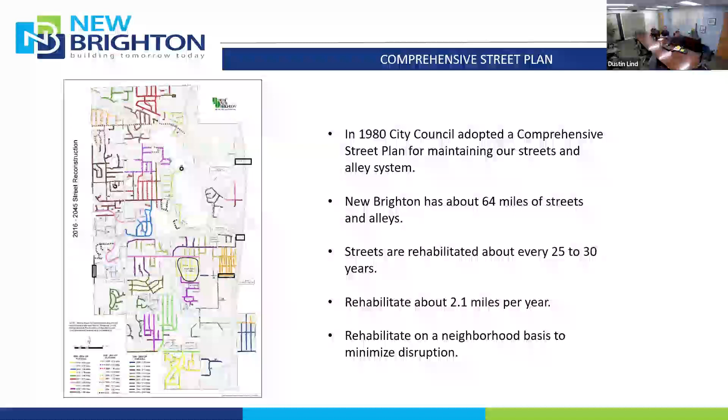New Brighton has about 64 miles of streets and alley in total. The streets are rehabilitated about every 25 to 30 years. Kind of breaking that down, we try to rehabilitate about 2.1 miles per year. And we also try to rehabilitate them on a neighborhood basis, just to minimize disruption to the residents.

More recently, on January 9th, 2024, the City Council approved a Living Streets Plan. The vision of that plan is to improve the quality of life in New Brighton through infrastructure improvements, being designing streets to include safe and comfortable routes for pedestrians and bicyclists, that also moves vehicles slowly but efficiently. We also look to create a sense of place that celebrates the feeling of community in the city and protect and enhance the urban forest and environment.

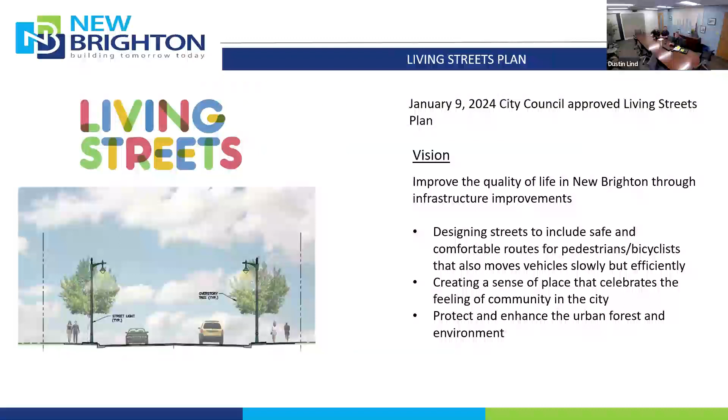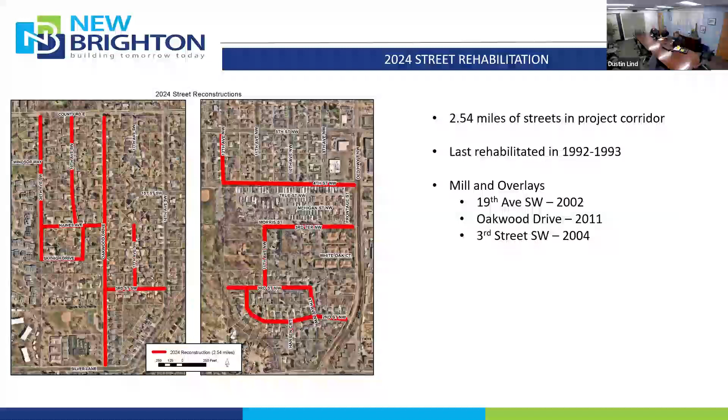So focusing on the project for this year, there are 2.54 miles of streets in the project corridor. The streets were last rehabilitated between the years of 1992 to 1993. There were a few streets that did receive mill and overlays. Those are 19th Avenue Southwest in 2002, Oakwood Drive in 2011, and 3rd Street Southwest in 2004. The streets that were mill and overlaid, we typically expect about 10 to 15 years performance from that mill and overlay. And looking at those dates, we're certainly pushing up against that right now.

Street improvements. So on the surface and at a first glance, what we're proposing for the surfacing is remove the existing bituminous surface, remove the existing aggregate base material, installation of new aggregate base section, and then installation of a new 5-inch bituminous surface. That will give us a 9-ton road, which is a little bit beefier than what's out there now, and we expect it to last at least another 30 years. The last piece to that would be to saw and seal expansion joints in the new surface to kind of control that seasonal cracking that happens, those freeze and thaw cycles.

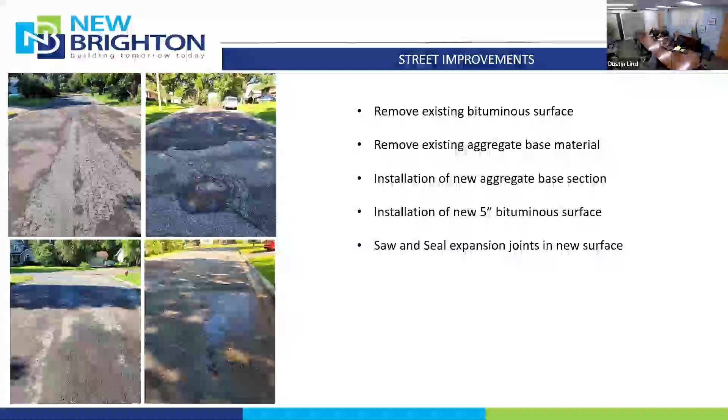Street improvements, living streets implementation. So right now I'd like to talk about and go over how we're going to tie the newly adopted Living Streets Plan into this project. This would be the first year that we're looking to implement that. So to help us through that, we created a checklist to use on each street and analyze what's going on with that street. And what we're really looking at is street category. Are the streets local, minor collectors, or do they carry a lot more traffic like major collectors?

We also looked at potential needed features and action items, those being sidewalks, proximity and connectivity to parks, schools, trail networks, etc. Bike facility needs, whether those are painted lanes or protected. Parking needs, tree canopy improvements and additional boulevard trees, storm sewer and drainage improvements, placemaking opportunities, public transit adjustments, and crosswalk safe routes to school. With all that said, utility improvements and impacts also are considered during the review, because if we have a large scale utility improvement that impacts a lot of curb and gutter, that's the time that we would like to make some of these changes and be more inclusive with the Living Streets plan.

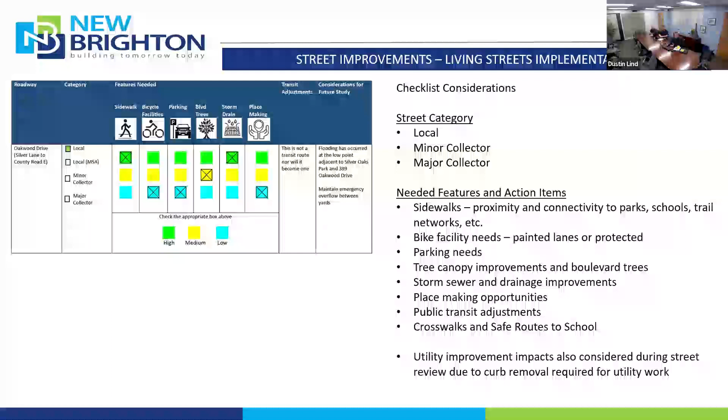So after reviewing the checklists and all the streets, we did find some needed features that are certainly needed in this area. One being a street width reduction to promote safer streets. Two being sidewalk connectivity to Silver Oaks Park and Hansen Park. Potential for additional boulevard tree plantings also came up, and storm sewer improvements to reduce localized flooding.

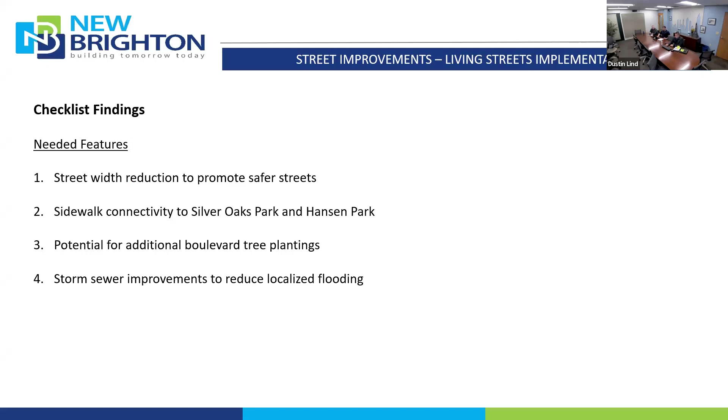The first thing, sticking with the Living Streets plan, is to go over what we're looking at for the street width reduction. There's a map here on the screen. There's a lot going on there, a lot of colors. I'll walk through it here. So the green streets right now, we're proposing to reduce the width from their current width of 30 feet to 27 feet. So overall, that would be a 3-foot reduction in the street width.

The blue streets, we're looking at a street width reduction of 6 feet, so going from their 30-foot current condition down to 24 feet. And the red streets, we're proposing no changes to the roadway width at this time, primarily due to there's no major utility work taking place on those streets, so the curb lines will largely stay intact on those streets.

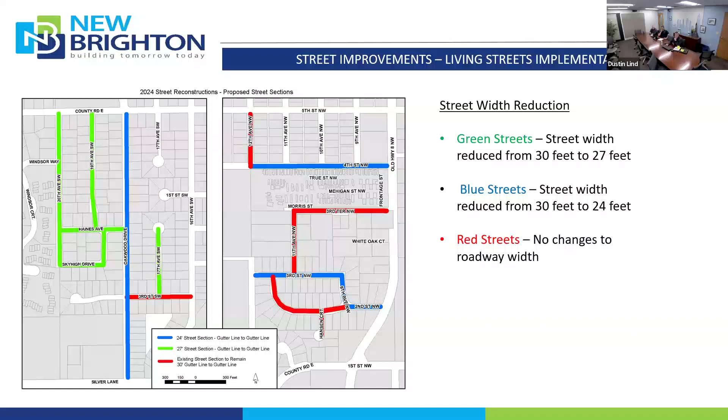And then just to dive into a little bit more what those sidewalks will look like. The sidewalks are proposed, as you would have noticed, on the 24-foot wide streets. So we'll be shrinking the streets down a little bit more to accommodate that sidewalk and boulevard. We're looking at a 5-foot wide concrete sidewalk and a 5-foot wide grass boulevard. The key piece is the outside edge of the sidewalk will extend roughly 3.5 feet from the existing back of curb location. So we're not taking the 5-foot boulevard and a 5-foot sidewalk and putting it 10 feet up into someone's front yard. With the reduction of the street width, we'll actually be pulling it in a little bit from that.

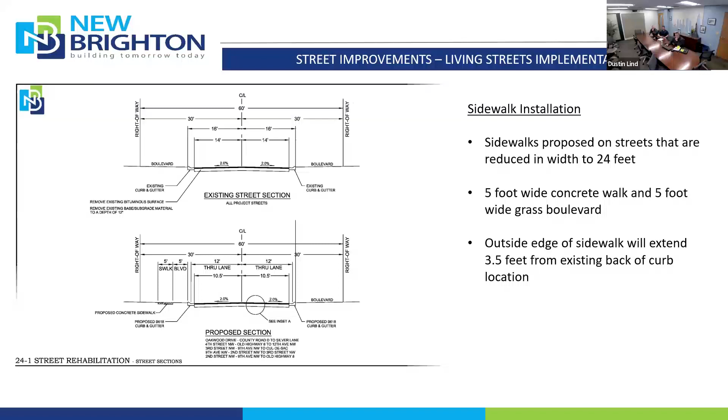So the water main work will take place on 20th Avenue Southwest, Haynes Avenue, Sky High Drive, 19th Avenue Southwest, Oakwood Drive from County Road E to 3rd Street, 17th Avenue Southwest, a little bit of Second Street, 9th Ave, and Third Street Northwest. In total, there's 9,000 feet of water main that's going to be removed and replaced. 140 service lines, and we'll replace the service lines from the water main to the curb stop. 38 water main valves and 18 fire hydrants.

Water services with a history of freezing will also be insulated during this process. And it's also important to note that while we're doing this water main removal and replacement, those houses affected will have to be put on a temporary water system. Essentially it is a plastic pipe run in the boulevard, and then houses are fed via drinking water garden hoses to their spigots.

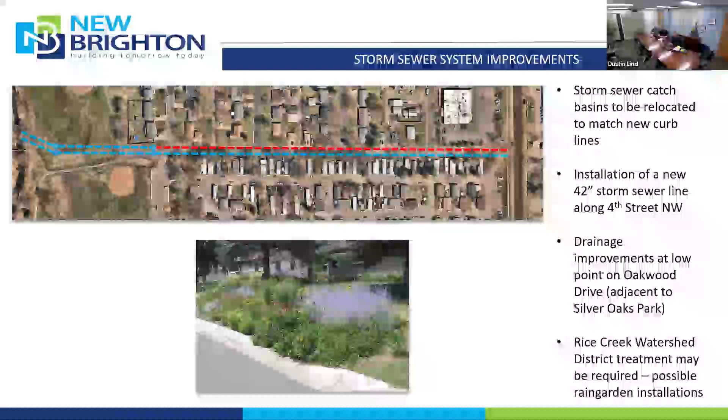Storm sewer system improvements. When we look at shrinking the roads, the curb lines obviously go with it, and so do the drains that are located in the curb lines. So a majority of the catch basins will be relocated back into the curb line.

Most notably, the biggest storm sewer improvement is going to be the installation of a 42-inch storm sewer line along 4th Street Northwest. This is being installed to mitigate some local flooding issues, actually east of Old Highway 8, kind of in the industrial area.

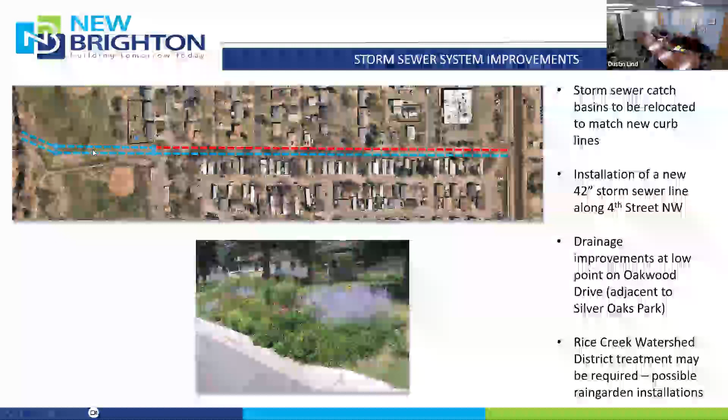The blue line on that screen is an existing 42-inch storm sewer system. And then we actually installed, ahead of this project, a secondary 42-inch line here through Hanson Park when they were working on that project this summer. So essentially we'll be connecting from Old Highway 8 down to what was constructed this past summer.

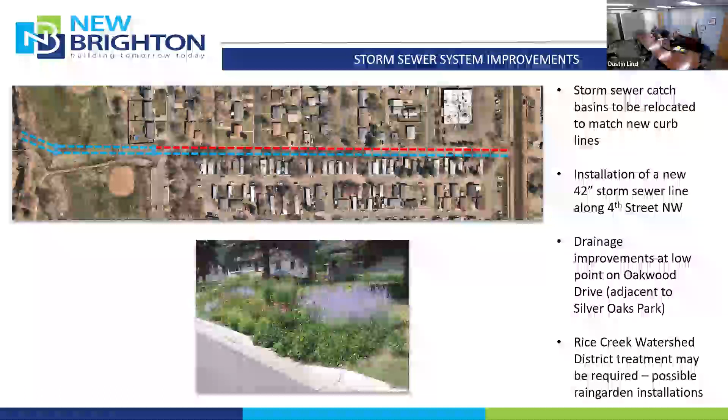We're going to look at drainage improvements at the low point on Oakwood Drive. That's adjacent to Silver Oaks Park. Historically, there's been some flooding in that location. And then Rice Creek Watershed District treatment may be required. We are in contact with them, trying to work through that process if required. You're likely going to see installation of some rain gardens behind the curb as pictured in that picture on the bottom there.

Project funding. So for the street reconstruction portion of the work, that being only the new asphalt surface and the aggregate base material, 75% of those costs are paid for by the city. The remaining 25% are considered assessable and they're resident paid costs.

You'll notice that the sidewalk construction is all paid for by the city and not assessed to residents, as are all the utility improvements. So the water system improvements, storm sewer, and sanitary sewer system improvements are all covered by the city. That also includes curb and gutter. Those costs are considered part of a stormwater conveyance system, so those fall underneath storm sewer improvements and will be paid for by the city.

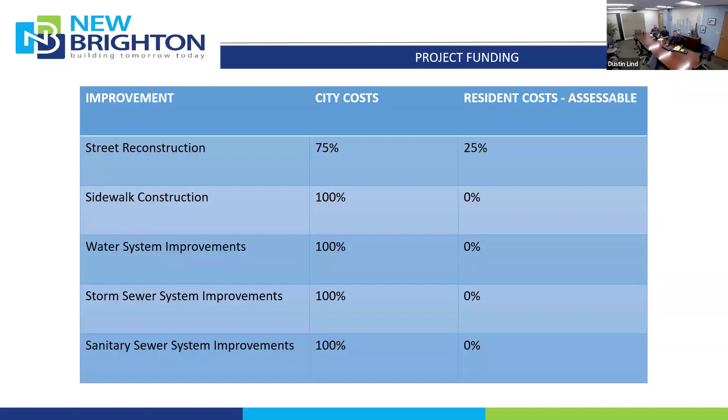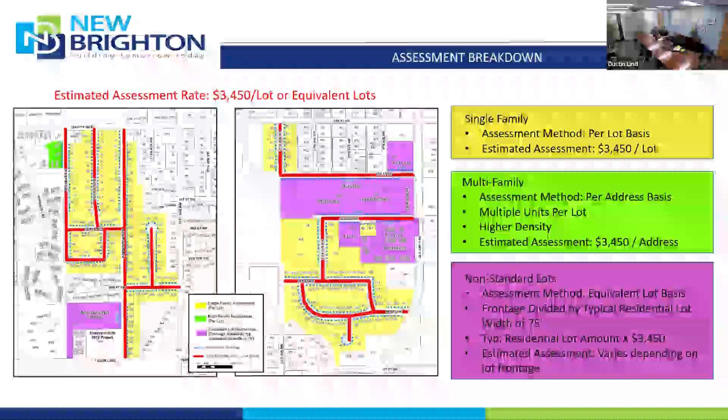So assessment breakdown. The estimated assessment rate for this project is $3,450 per lot or equivalent lots. That's historically been the most common and equitable way when largely all the lots in the project are the same size, same use, and receive the same benefit from the project as a whole. There's a few anomalies to that, and there's a lot going on here, so I'll just kind of break this down and go over what each and every one of these colors are and what it means for residents.

So I'll start with the single family lots. Those are pictured in yellow. As I mentioned, they're on a per lot basis, meaning each lot's going to receive the same assessment amount, which is estimated at $3,450 for each lot, regardless of street frontage.

And I'll note that corner lots will receive only one assessment charge, same as every other property that's a single family, because New Brighton's policy is to assess on the short side of the lot, meaning you won't be assessed on both sides of your property if you are a corner lot.

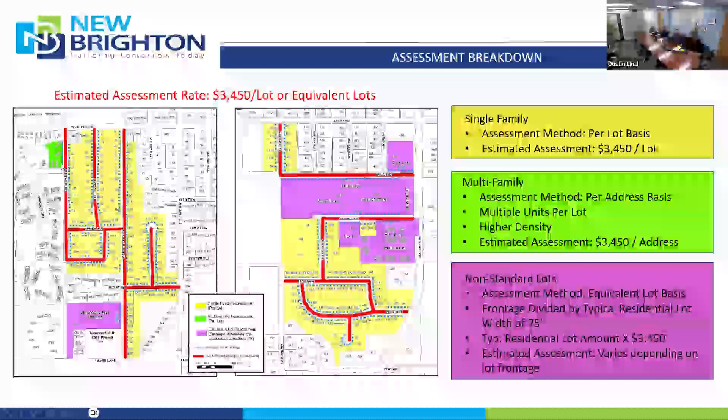There are a few multifamily or duplex properties located on 20th Avenue. We are proposing assessing them at the same 3,450, but per address, based on the higher density, and there are multiple units on that property. So they'll receive an assessment rate of 3,450 per address. So times two, there's two addresses, duplexes on those properties.

And the last piece, I kind of call non-standard lots. So those are properties that have frontage on one of the street rehabilitation streets, but are part of a much larger parcel. So those you're looking at like a Silver Oaks Park, Oak Grove Mobile Home Park, kind of the Mirage area, this White Oak Court, the Heritage Oaks Townhome community is a little bit of an anomaly, and then there's one lot that's already been split but is recorded as one right now.

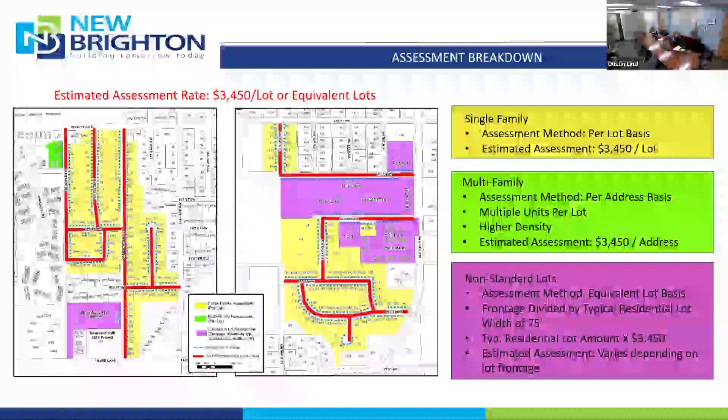So to handle that, we're looking at an equivalent lot basis, meaning we're going to take the front footage that abuts the street and divide that by the city standard lot width, which is 75 feet. That will give us an equivalent amount of residential lots that in theory could be on that frontage. And then we'll multiply that amount by the 3,450 per lot basis. So that assessment amount will obviously vary for each one of these properties. If there's any residents on here, business owners, feel free to let us know and we can talk more about what your specific situation is in more detail.

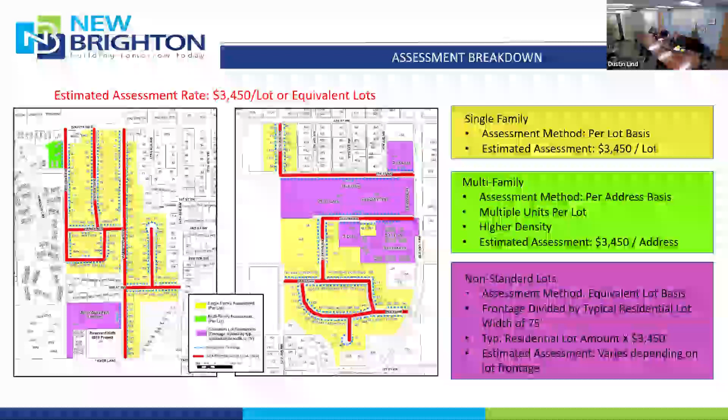Assessment breakdown. So payments are available in two ways. The payment in full is accepted for 30 days following the assessment hearing, and that's underlined, that the assessment hearing will not be held until September of next year, so September of 2025. We like to do that the year following just to make sure all of our project costs are in line and we're not missing anything.

If payment is not received in full within that 30-day window, the payment amount will be certified to Ramsey County for collection with taxes over a 10-year period. So that'll be spread out evenly over a 10-year period. That does include interest charges. And I'll note that it can be paid off at any time during that 10-year period without penalty.

The last piece to this, there is a senior deferral option. In this case, they have to meet certain criteria. Those would be the homeowner has to be 65 years of age or older, the property has to be homesteaded, and the annual assessment amount has to exceed 1% of their adjusted gross income. In each case, applications can be filled out and submitted to the city. If it's approved by council, essentially the assessment amount will be deferred until sale of the house or death of the owner.

So with all that work that we just looked at, I talked to Xcel here a couple weeks ago, and they plan on continuing their private utility installation. So Xcel Gas, they were out there this past summer working on County Road E and Oakwood. They didn't quite finish what they wanted to, so they're proposing coming back. They're thinking April to May they'll be in there working to replace their gas mains, hopefully in front of our project.

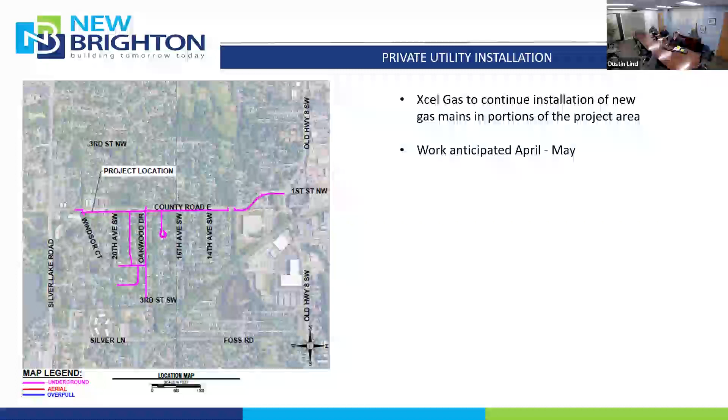Project schedule, just a quick snapshot at where we're at and where we want to be with the project schedule. The neighborhood informational meeting is kind of the first step into the project. After this informational meeting, we will hold a public improvement hearing. And that's essentially where we bring a feasibility study to city council and run through everything in the project, what's going to take place, what the actual proposed assessment rates are going to be, and the cost to the city. We're looking to hold that in March.

We're looking to award a contract sometime in April, maybe early May, and then start construction ideally early summer of this year. Project completion, I have a fall 2024 / summer 2025 completion date. And that's really going to be based upon who the contractor is and how many crews they can allocate to this project. There's a lot of utility work and a lot of mileage of streets and sidewalk and curb and gutter. So it's a bit of an unknown if contractors can bite off this size of a project and complete it in 1 year, but we hope that they can. And then looking at the assessment hearing, like I mentioned, in September of 2025.

Just a few notes to run through that were included on the previous slide. Access to property: residents will have access to their driveways during construction, except when major construction activity is happening adjacent to their property. I will note that water main installation is quite disruptive, and when they're installing water main on your block, if you're on one of those blocks, it's not going to be fun. The water main's about 8 feet deep, and they're digging down the middle of the road, and it's going to be a little bit challenging during that time. We'll have staff on site every day to coordinate with residents and coordinate access. So we'll keep in touch and do our best to limit disruptions for everybody.

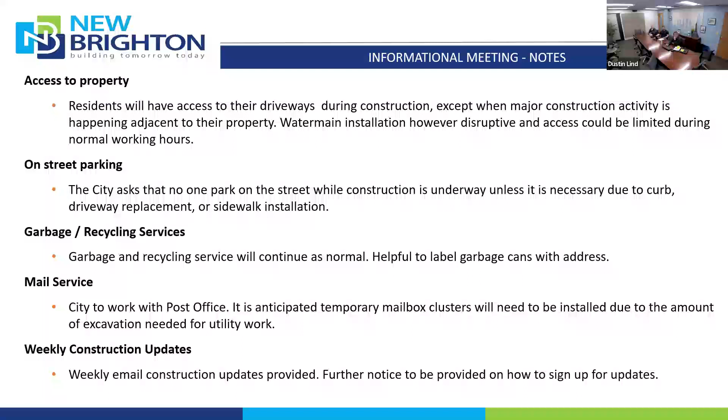And lastly, for my portion, I have a little bit of a plug here for Silver Oaks Park. It's in the area, and it was brought to my attention earlier this week that they are also having an informational meeting tonight at the same time. So I told them I would grab a few slides from them and just kind of go over what they're talking about at that meeting.

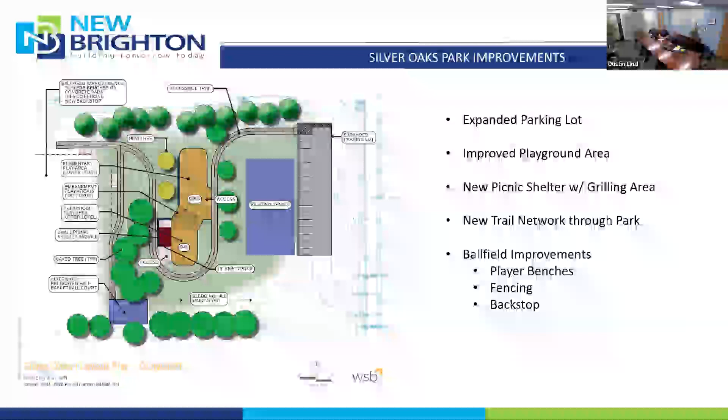The schematic there kind of shows the latest and greatest proposed plan. They're looking at expanding the parking lot to the north, on the east side of the park there. The existing tennis court is going to remain in place. There'll be some playground improvements, a new picnic shelter with a little grilling area, a new trail network through the park, and then some ball field improvements, which include player benches, fencing, and a new backstop.

Right now, I'll turn it over to Steven Toso here. He'll be your kind of main point of contact in the field. He'll be out there every day, coordinating with residents and contractors and making sure they're doing what they should out there. But he'll just run through some pictures here on truly what to expect with all the utility work and street work that we kind of went over.

Yeah, like Dustin said, I'll be out with the contractors every single day, driving the streets, making sure everything's going per plan. And I drive a white city vehicle. It's an F-150 with a big light bar on it. If you see me, just flag me down and we can talk about what's going on that day or whatever. But I'll be on site pretty much every day. So I'm your first contact. So call or email me if you have any questions or concerns that need attention right away.

And just going through the project schedule, this is what you'll see first. The contractor will bring out a large either reclamation vehicle or a milling machine and strip the asphalt surface from the street. And they try to only do this on areas where they'll be working. So we try to keep the asphalt in place so you can get in and out. We don't want to rip it up and have it turn to mud too quick. So this will be the first step in the process.

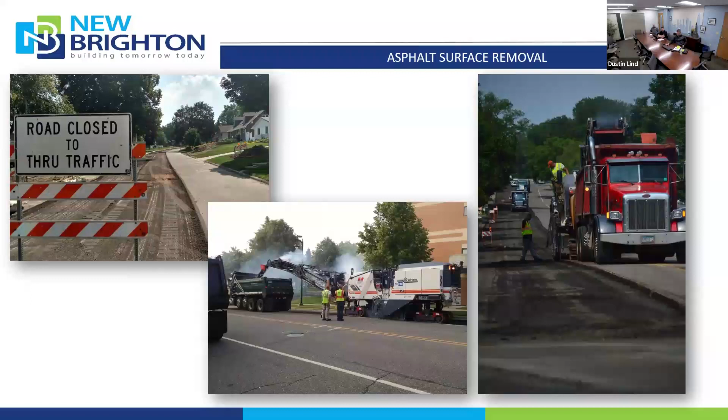I will kind of add to that, and one bonus on the side of being supplied with temporary water is it's being backfed through your house. So it's not going through your meter. So essentially you'll get free water throughout that duration.

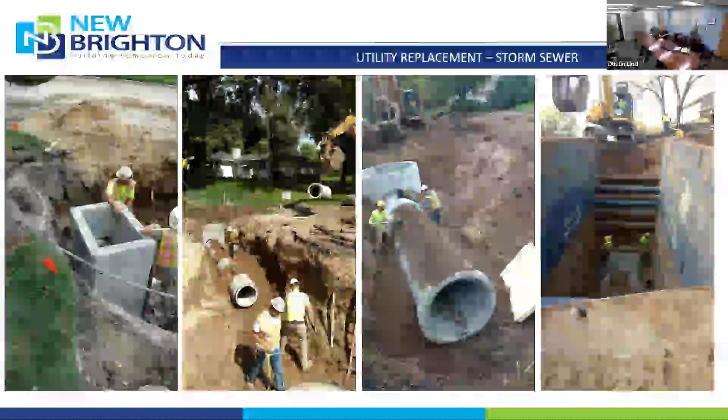And what you're seeing here are storm sewer improvements. That image on the right, that's some deep excavation there. You can see how small those guys look in the hole. That's kind of what all of 4th Street is going to look like for several weeks. It's a 42-inch pipe going down that street. It's going to be long, slow digging. And then the one on the left, that's kind of more your typical storm sewer structure. Just a little 2x3, and the storm sewer stuff goes pretty quick and they can go through that relatively quick.

And then, yeah, we do a significant amount of curb removal on this process. Every street that's getting new water main will be getting new curb on each side. Every street where we're shrinking will get new curb on each side. And on the north side of the project, 2nd Street, 3rd Street Northwest, 4th Street, that already has

B618 curb. The curbing on the south end of the project by Oakwood Drive is what you call surmountable curb. So it's a drive-over curb that will be transitioning to B618 curb, which you kind of see on the right side here. So it's a barrier curb, it protects the pedestrians on the sidewalk a little bit better. And then we will be installing curb cuts in front of every driveway.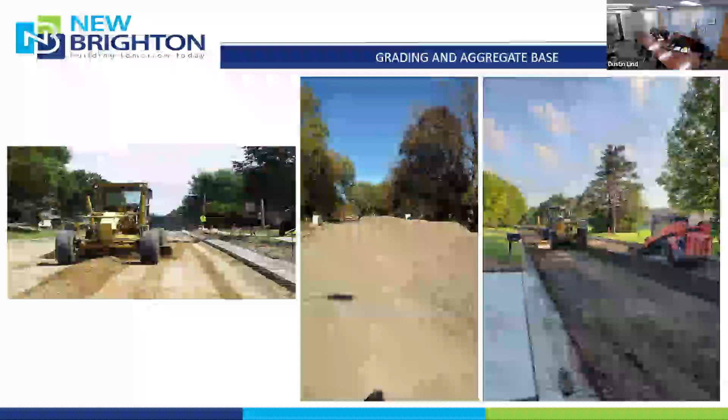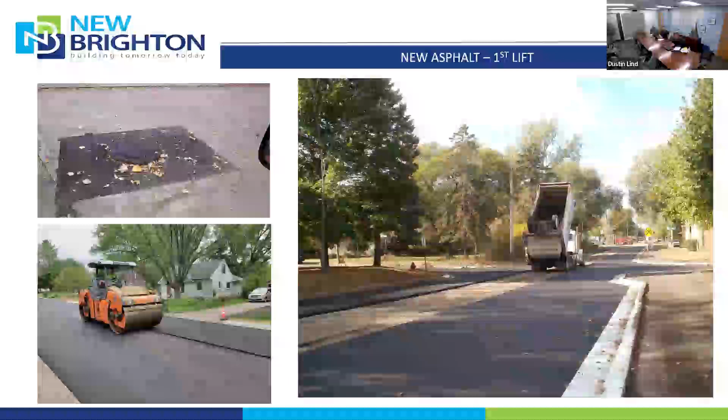And in New Brighton and on these streets, pretty much everywhere, we do 2 lifts of asphalt. The first lift of asphalt is typically 3 inches. We lower all the iron, so all the manholes in the street, and then we pave right over them. And then we come back later and saw cut through this first layer of asphalt, raise up those structures and the iron and the castings 2 inches above the surface to get ready for the next lift of asphalt.

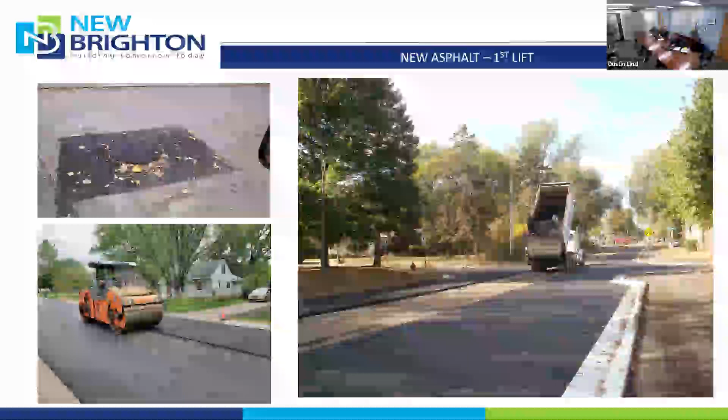And this is when things are going well. We get the final lift of asphalt and everything's put back together. We're starting to restore the project. And yeah, this is our second lift, typically 2 inches. It's a little bit different mix, so it looks nice and smooth on the end.

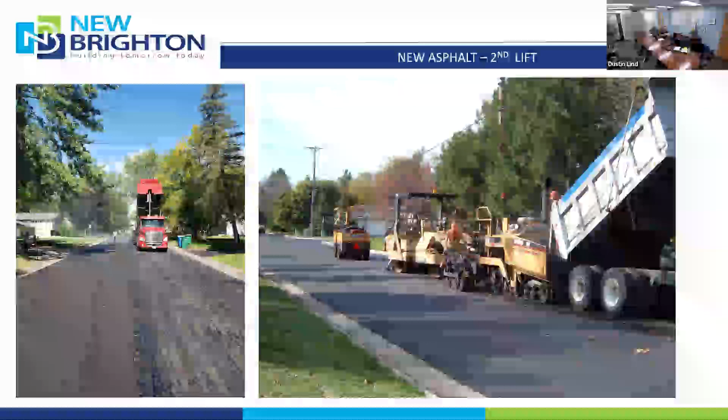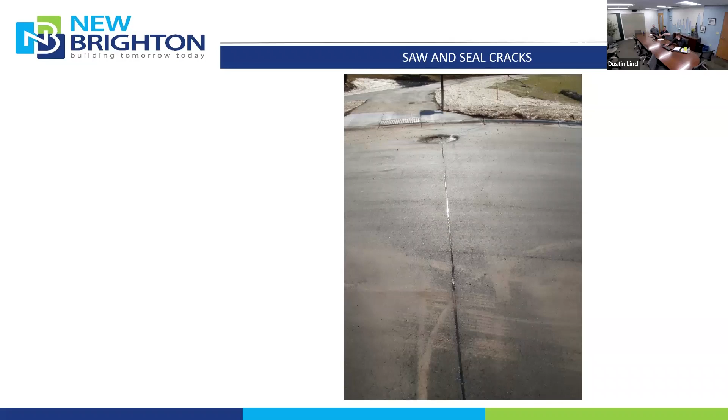It may not be a good idea to replace your driveway, noting it could get muddy, the streets are gonna get dug up. The last thing we want is to get a nice new concrete, pretty white driveway and then drive on it with muddy tires for the summer. If you've ever had a frozen water service, please let us know. We keep track of that, but in case something's missed, please let us know.

Dates of special events, family gatherings. This is gonna take place in the summer, so graduations, anniversaries, anytime you're expecting a large crowd, let us know and we'll do our best to work around those events. Any drainage issues, if you're aware of any ponding or any flooding that we haven't covered, please let us

know. And then more importantly, the special accessibility needs, we'll coordinate just like with any of the gatherings. If there's anybody that either uses Metro Mobility or needs some special access, we'll certainly work with them on getting in and out every day and when they need it.

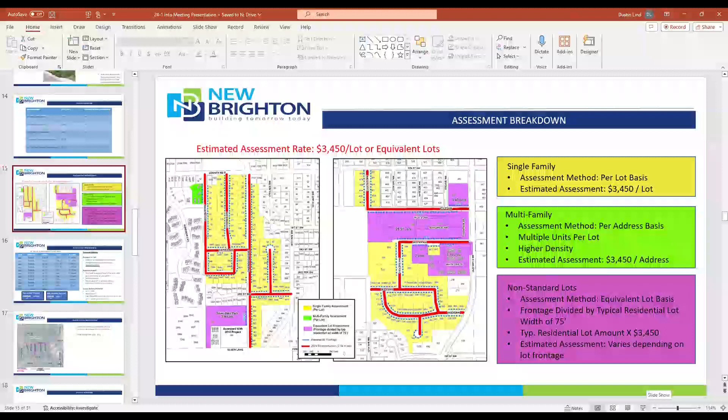So I think it's in the purple area for those of you on the video call. So it's a non-standard lot. So will people in the association pay different amounts based on this formula you have in there? Yep. So I'll kind of run through that there. That is a little bit of an anomaly even from the other non-standard lots.

So what we're proposing there is taking the front footage, what adjoins Third Terrace there. You'll notice the blue line kind of right here, if you see my mouse. Yep, I see it. That is the frontage. You guys were given a corner credit, similar to the corner single family houses, so that's knocked off the footage. And what we're proposing is taking that, 233 feet, dividing that by 75 brings you to 3.11 equivalent lots. That number will be divided out amongst the 29 properties within Heritage Oaks.

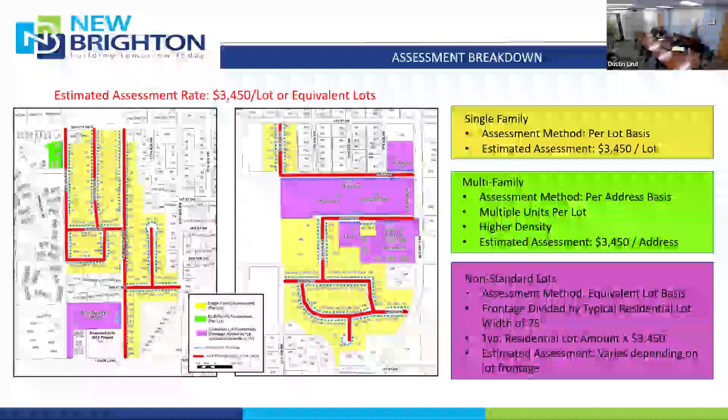So we recognize that, yes, there is frontage, and you do use Third Terrace. It does benefit to get in and out of the townhome association. But you also have HOA dues inside there too. So that's why we decided to split that amongst all those 29 properties within. Okay, so if I'm hearing you correctly, somebody might pay 3,450, somebody might pay, I'm just making it up, 2,900. Nope, they'll be split out equally. Oh, okay, so we'll all pay the same. Correct, within Heritage Oaks. Okay, and we don't know what it's gonna be.

Everything is an estimate at this point. The project will go to council at that public improvement hearing with a formal feasibility study. At that point, it'll be ordered if it is, and then we'll have a little bit more of an idea of the exact amount. And notices will be sent out to everyone involved in this project, who can attend that public informational meeting with another number on there.

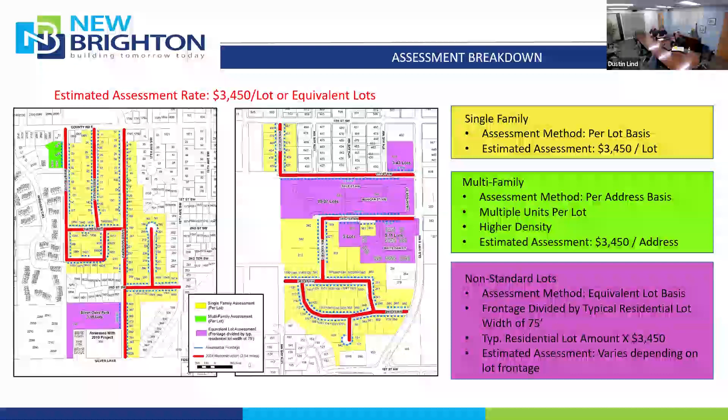Okay, and the hearing is gonna be held in 2025? No, the hearing will be in 2024, but we pay in 2025? Correct. So there'll be a couple different public improvement hearings. The first one, the public improvement hearing, is on the onset of the project and council physically orders the project. The assessment hearing is held prior to us physically adopting the assessment. So that's the one that takes place next year. Okay. Thank you. Thank you.

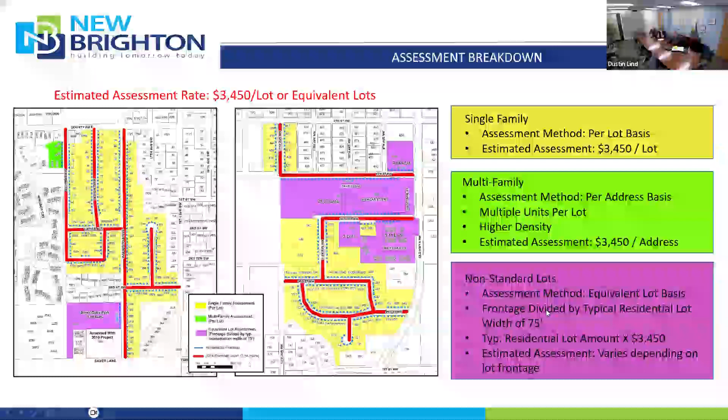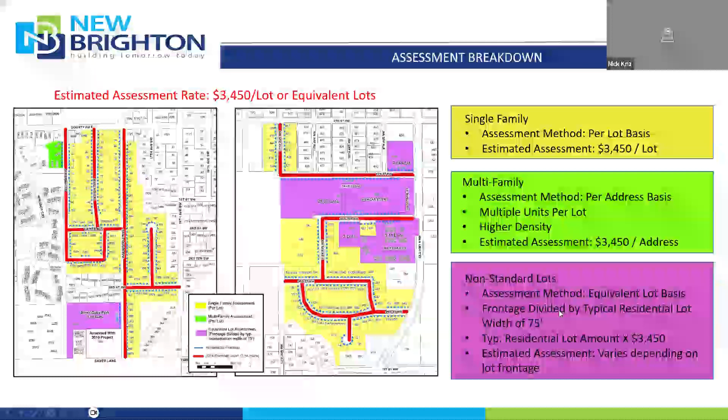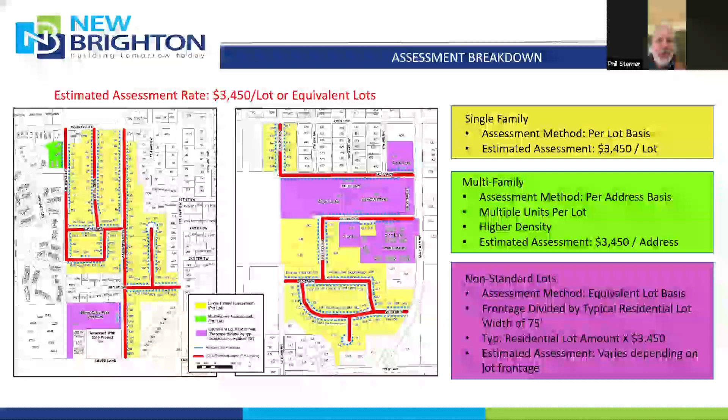Yeah, my question was on the sidewalk. You have the sidewalk on one side of the street, and I'm concerned with Oakwood Drive. Did you consider putting it on the other side where the park and the townhome association is, since they're already doing improvements and you got the park setting already? Seems like a lot of homes have had things done on their yards, and they do a lot of good upkeep on their yards, a lot of pride there. And I know with the street shrinking, it's gonna minimize that, but on the other hand, you have open parkland and townhome association land on the other side of the street. So just wondering about comment on that.

Okay, thanks, Phil. You're talking about Oakwood Drive, so the sidewalk is proposed on the west side, kind of coming down the hill. Yes, correct. We proposed it on the west side for connectivity to the park. The last thing we want to do is put a sidewalk on the east side. Now you're creating mid-block crossings or people crossing Oakwood to get to the park, which could be a little bit of a safety concern. So there was some thought into that, which is why it went on the west side. Okay, all right, thank you. Thank you.

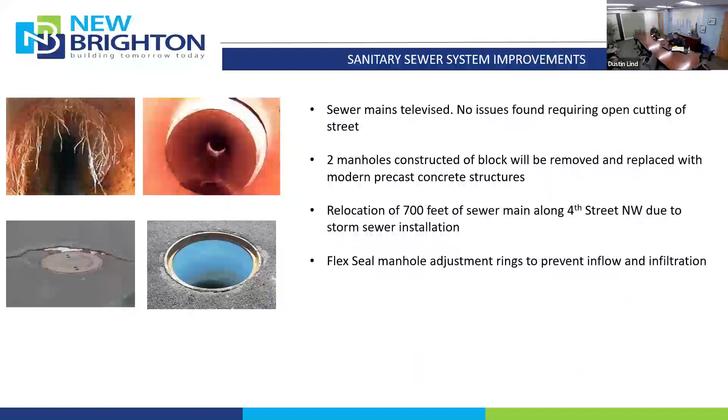Okay, and then just another quick one. You asked in the last slide for some information from residents about different situations we might be in. Who should we contact with that kind of information? Any one of the folks on that last slide, let me page back down. Yeah, okay, I've got that. Okay. We're also on the website too. If you go under the Department of Community Assets and Development, we're here at City Hall every day too. So feel free to stop in. Gotcha. Okay, thanks much. Thank you.

All right, it's just the first name of Michael. Michael, you can unmute whenever you're ready and ask your question. Yeah, thank you. I had a question about 12th Avenue Northwest and who we would bring it up to to get a speed table on the street to help with the speeds. A lot of people go to the park, especially with the renovations in the park. A lot more people are traveling there. And now that the parking lot's consolidated, there's a lot of traffic that moves down our street at a high rate of speed.

Well, we could certainly look at that. Typically speed bumps or speed tables are something that we wouldn't install, for snow plowing purposes and potential emergency vehicle access. It slows them down. Our snow plows have a hard time with those. They'll get ripped up. But I jotted that location down, and we can start taking some speed studies and look at it as a whole and see what we can do.

For traffic calming measures, if that 12th Avenue piece would have been included in some utility work, certainly we would have looked at shrinking that one up as well. And by shrinking the streets, it naturally encourages people to drive slower because it feels more tight. But it just was not ready at this time.

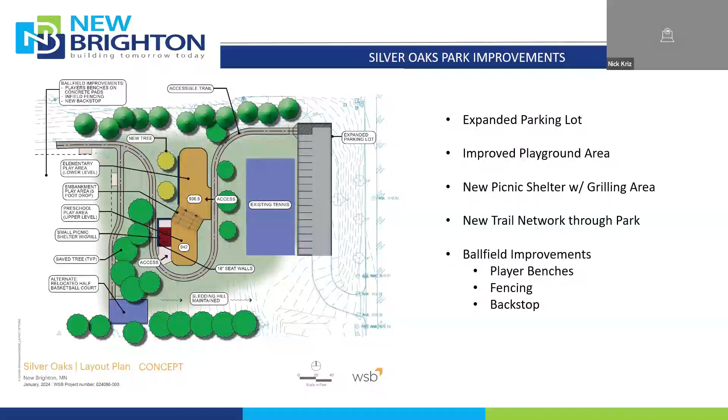So George, I see that you said this is a big problem, and you asked how you can get unmuted because we have inaccurate information. Unfortunately, all we can do from our end is ask you to be unmuted. I will do that again in just a moment here for you. But we don't have any control over your Zoom client. So let me just try that one more time. There we go. We've requested you to unmute one more time. I apologize, George. We unfortunately still can't hear you.

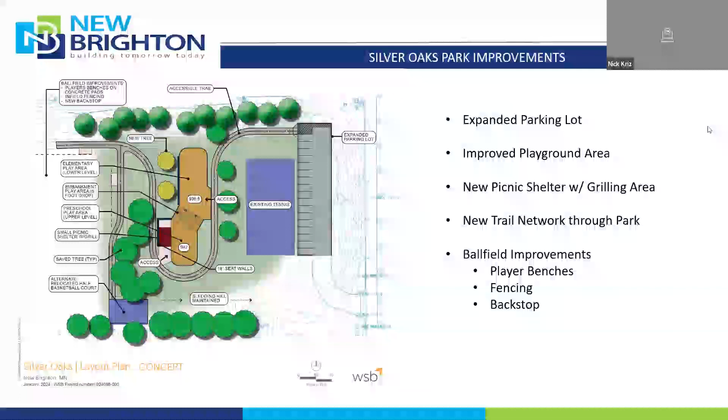Dustin, would you mind moving back to the end slides where you can see that contact information? Yep, I was just gonna say, George, feel free, my contact information is there, either phone or email. Please reach out to me, and we can kind of discuss the specific situation in more detail, and kind of go from there. All right, I do apologize for the technical difficulty, and hopefully you and Dustin get that worked out outside of this meeting. I'm gonna move up to David.

Oh, I'm gonna mess this up. I'm so sorry, Cornoyer. I'm gonna ask you to unmute and you can speak your question.

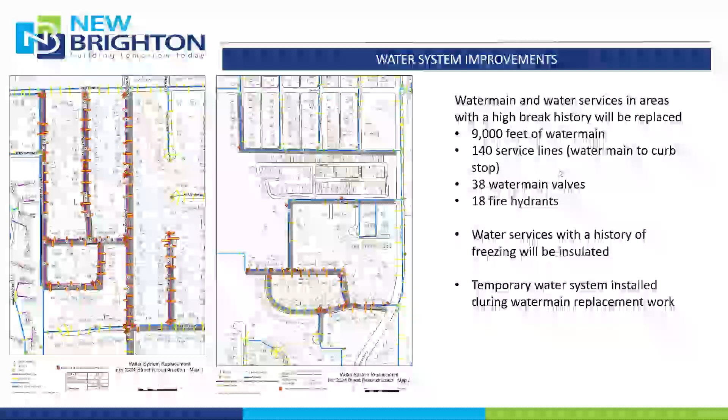Yeah, thanks. One of the reasons I raised my hand was so that you could see my neighbor Diane wanted to ask questions too. I'm at 63 Oakwood, and I got to tell you a couple things, and they're going to come across kind of probably nasty by Minnesota standards, but I think the letter I got in the mail on this was maybe the third piece of information I've gotten from the city on any issue in the 3+ years I've lived here. So not impressed with the communications from the city of New Brighton, just generally. So when you say that you're going to communicate with us on things, I'm already entering into that pretty skeptically.

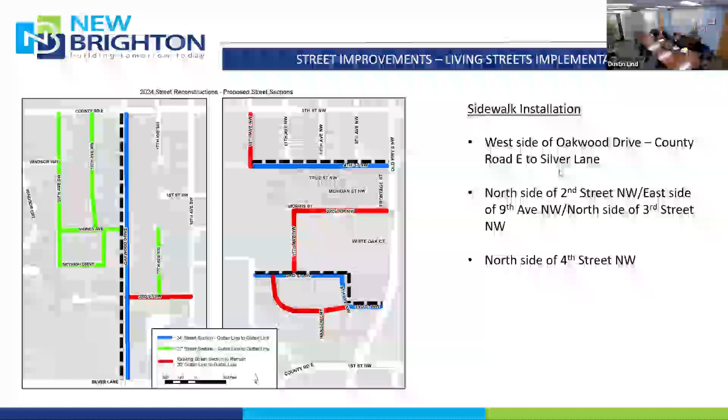I just have to tell you, as a homeowner and a taxpayer here, I moved here after many years in St. Paul. Are you going to plan to answer the questions in the chat at some point, either on a website somewhere or otherwise? Yeah, I'm just trying to get through kind of the raised hands now, and then we'll jump over and tackle the chat room. Okay, well, you may not get to them tonight, but one of the things I definitely want to see as a taxpayer is a detailed budget on this.

I mean, when you're going to charge each of us, you know, $3,300 or whatever it is, $3,100, and claiming that it's 25%, I think we need to see the detailed numbers on that. And I think we also need to see the detail on the contractors involved. All of us experienced in the last year or so the old Highway 8 reconstruction, and I'm guessing that was not a New Brighton project, but it seemed to take forever, and it seemed to not really have a lot of logic. And I know that that can happen at times, but just based on that recent experience, it wasn't lovely.

I got two questions. Here's the first one. How long are our streets literally going to be dirt roads generally? What is that going to be like on pieces of Oakwood or elsewhere? So that's a little bit difficult to answer. We're going to phase this project in a means where they tear up as little as they can to complete certain portions of the work. Gravel is less of a concern to me once it's gravel. It is dusty, and we can water it, but it is dry. So at this time, I can't necessarily answer that question. I would expect maybe a month and a half, to be honest, where it could be gravel, before they get enough road surface done to come in and pave portions of the project. Okay. Thanks for answering that.

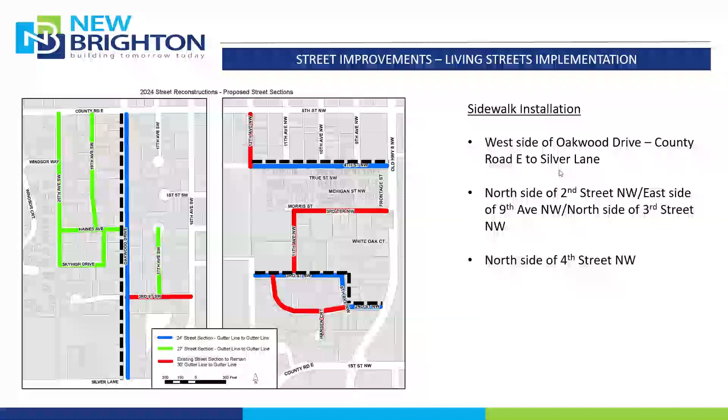Let me tell you, easily on Oakwood Drive, 1 of every 3 cars is going way over 25 miles per hour. So this isn't a matter of whatever you might have in your mind about the types of people that complain about this, but it's an issue here. And the fact that you're letting some plow guy tell you how to run your city is ridiculous. Those guys are skilled at bringing up the plow. They can do this. I've heard the same things with circles in St. Paul. Oh, the plows can't do their job and whatever. They can work around this. And it's a serious problem on Oakwood Drive, speeding. Thank you.

Thank you. I'll touch on that a little bit. I wasn't speaking to all traffic calming measures, primarily just the speed bumps. That's something that we just aren't comfortable installing. What we're looking at with this Living Streets plan is exactly the concerns from you that we want to address. So now with Oakwood being shrunk down by 6 feet, one of the most effective traffic calming measures is actually shrinking the street. People tend to drive what they perceive as comfortable; with a big wide street, you naturally feel like you can go faster, so we're shrinking the street down.

It's going to feel tighter. There's going to be traffic a lot closer to you coming the other direction. If there are cars parked on the street at that width, you may have to slow down and wait for a car to go by you to get around that car. So that's kind of the things we're looking at with this road reduction, is making roads safer and encouraging slower speeds.

We've got Engdahl in here. And I believe our last speaker was talking about Diane Sager. I don't see the hand up, but I will ask you to unmute after the current speaker. Hello, can you hear me? This is Leisha Engdahl. We can, thank you. Oh, good. Okay. Well, I live on 20th Avenue Southwest. Two questions.

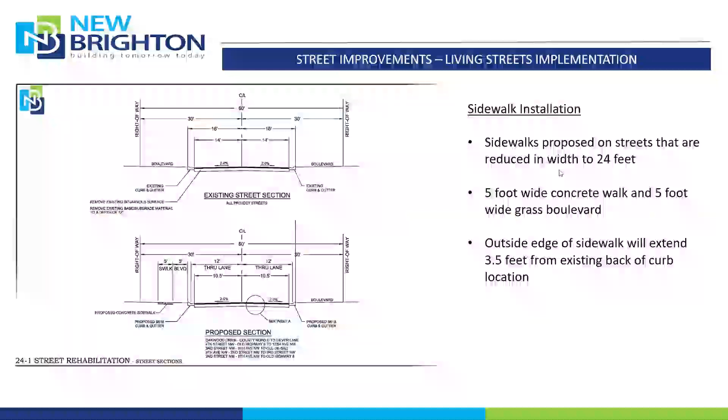Where exactly is the water main replacement happening? You went through that kind of quickly, so I was gonna write that down and didn't catch that. Yep, so pretty much all the water main on 20th Avenue Southwest will get replaced. It's currently located on the easterly side of the street. Yeah, and that's one of the streets that's going to be shrunk a little bit, only by 3 feet, because it's not getting a sidewalk.

But we may look to relocate that water main a little bit more to the west out into the street from its current location. But yeah, all of 20th Avenue Southwest will get new water main, and any resident will get a new water service from the main to their curb stop. And how much warning will we get prior to that happening, since we'll be getting water out of a hose for a certain amount of time?

If you're on that email update list, I'll certainly include that in there. Prior to us kicking off the project, we'll send out kind of a neighborly heads up, hey, this is gonna start happening. Setting up that temporary water system isn't lightning fast by any means. So you're gonna see that it takes a couple days to get everything set up for us to transition you to that temporary water system.

Either we can go in, or you can do it, but we have to close 2 valves that are by your meter, just to prevent water from coming back out into the street, since we're going in backwards. We'll be doing a lot of door knocking and door hangers, and just letting everyone know that it's coming, and like I said, you'll start to see some activity prior to it actually taking place. And then once it starts, about how long will it take?

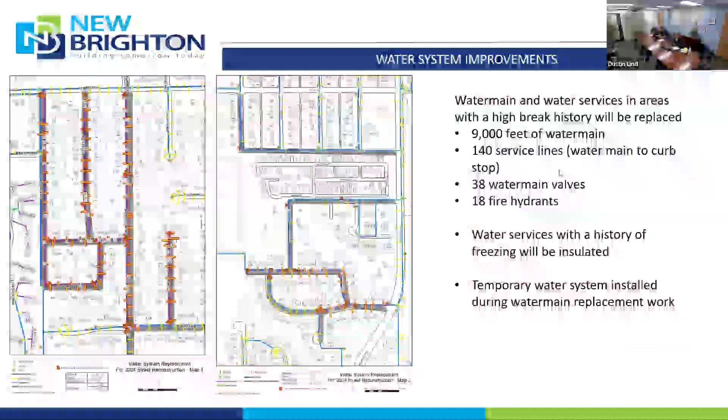That's a little hard to answer depending on how they phase it. Typically a water main installation crew, if they can remove and install 300 feet of water main a day, is a pretty good day. So they'll kind of work their way down the block, 200-300 feet a day at a time. They'll have to come back after they finish this section and put the services in. So it could be a month, and it could be maybe even a little bit longer.

Okay. And then my other question is, so last summer, we were kind of the staging area for Xcel. So right across our street, we had a porta potty, we had trucks idling all day long, as they were replacing gas mains. Actually it was very annoying because it went on all summer long and our street didn't even get done. It was just the staging area. How do you plan to work with Xcel so that they finish their part of things with the gas mains prior to you working on the street and doing the water mains?

That comes down to coordination. Like I mentioned, I've been in contact with them throughout the winter and told them that this is coming. They do know that it's coming. They try to get their facilities upgraded generally around the same time as the streets, just because then they don't have to worry about causing damage to streets if they're driving their equipment on them, knowing that we're gonna be in there replacing them. So they're very aware. It's just gonna come down to coordination, and I've already told them the sooner the better, get out of there.

We don't want to be working all over each other, and it's even more chaos for residents, so. Okay. Yeah, and I appreciate the fact that if you're having an event like a graduation or something, you said you'd try to work with us. So I appreciate that. Thank you. Thank you.

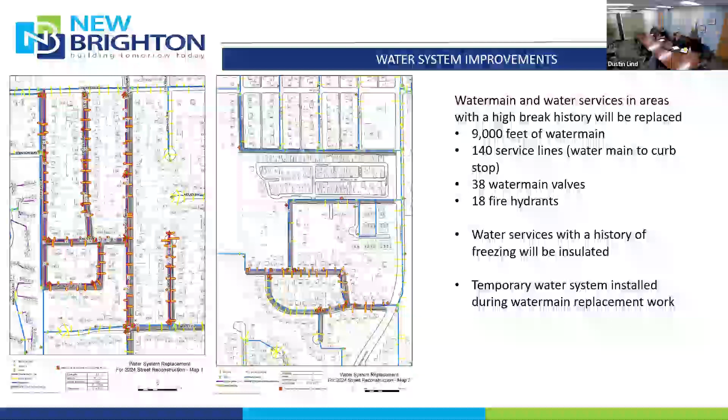Maybe before Xcel Energy moves in with their replacing the gas lines. Yeah, I mean, depending on when Xcel gets there, they're in the same situation. We've told them that they can't be blocking anybody's driveway or anything coming and going. So if that becomes an issue, by all means, let us know. But like I said, if it happens when we're working in there, it's no different than anything else. We'll do our best to accommodate what you have going on.

Okay, and as far as the assessment costs, yeah, I'm having sticker shock. But in our world, it's been happening a lot with me lately. Do you give a discount for paying in full? Do they bill us? Do we get statements sent? Yeah, so there's no discount for paying in full. By paying in full, you will avoid spreading it out over that 10 years, which does include what we're proposing is a 3% interest. So you wouldn't pay that.

I will just kind of note that when we put together this preliminary estimate, there's contingencies built in there. The last thing that we want to do is present a number and then come back next September and it's more. Nobody wants to be in those shoes. So typically we're under this number. I'll just note that. So we won't know the final amount until after this assessment hearing in September of this year. Yep, September of 2025 next year. Okay, well, yeah, I'm all for it.

My dad, I can just hear my dad. He passed away last fall, and that street, 16th, that street's really super wide. They're supposed to be using that street, but because it wasn't completed, it wasn't connected to Silver Lane for, I don't know. I don't even remember when they connected it, but they're supposed to be using that street to go through. I agree. I hear your frustration. I mean, that's predominantly the route we want them to go. Heard this from my dad for years. It's like if they would only open that up. But they didn't, and then people don't know, but anyway, yeah, the speed. I don't know what we can do.

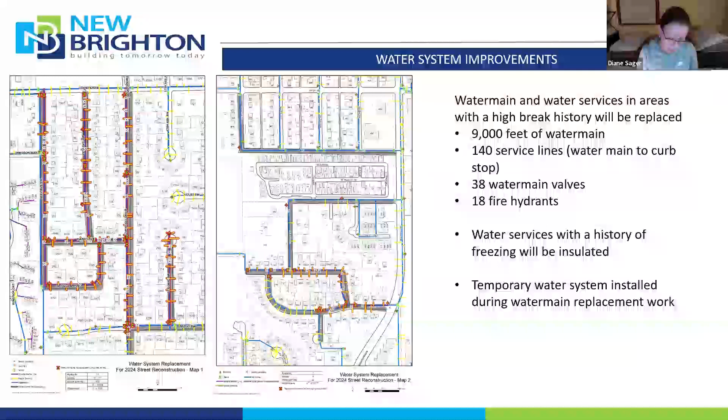And maybe it'll take someone getting seriously hurt or hit by a car, or I don't know, which is not the way to get things completed. But thank you, yeah.

Thank you. Yeah, and I'm with my neighbor on Xcel Energy. We had no idea that whole stuff was happening. It's just basically no correspondence, no letters stating that, hey, we're coming in. I was asking the work crew questions and they couldn't answer. They really didn't know. And so, yeah, I'm surprised we weren't even involved, knowing that that was going on. And I had new sod in my front yard and they're going to dig up my front yard. So it was like, wow.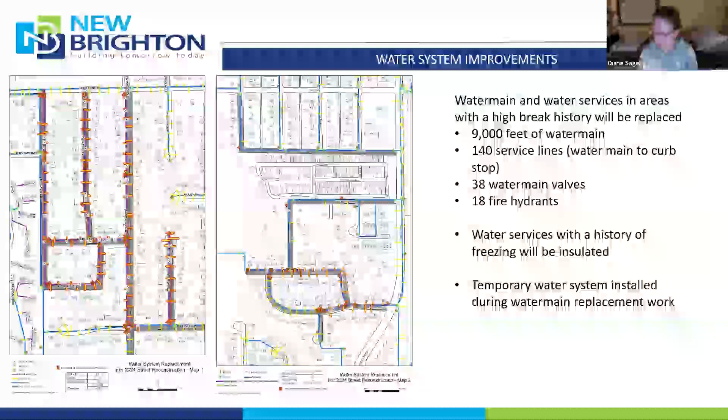But anyway, I know, progress. I'm not always an optimist. So, but anyway, thank you for your information and I'll be quiet now. Hey, thank you for your comments.

I think Steve has been working on the chat. Is there anything? Any recurring questions on there, Steve? A lot of questions about driveways, irrigation, speed tabling. I think what we already discussed, narrowing of the street. I think we've mostly covered. I'm responding to comments as they come in, and I think we're getting most things through the voice chat here. I think Graeme has his hand up there. Yep, Graeme, unmute, go ahead.

Hi, folks. Full disclosure, I am a New Brighton City Council member, but also a resident that will be affected by this project. Maybe I just missed it in the chat, but for those of us that may get a new sidewalk, whose responsibility is it to keep that clear if we have another winter again? Optimistic about snow. Thanks, Graeme, for attending. That sidewalk that's going to be installed will be just like any other sidewalk in the city and will be maintained by our public works crew, including snow removal.

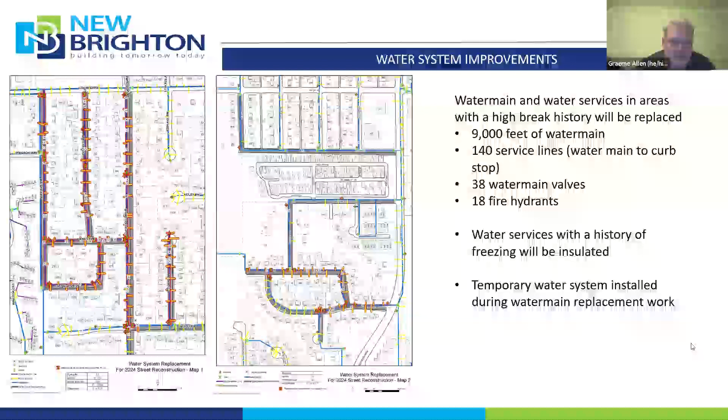Are you still there, Graeme? Yes, that was the question I had. Thank you. Okay, thank you. Is there anything else you can't answer, Steve? Just kind of panning through here. It doesn't look like anybody else has their hands up. And if there's any other questions, Steven here has been trying to answer them as we're moving along.

Hey, Dustin, the one question that I see that has not been asked yet, and I'm confident you have a wonderful answer for. Jody Gustafson asked, how are you going to ensure that emergency vehicles are able to get in during this time? We have an older neighborhood, and that is very important.

Yeah, so to answer that, it gets a little hairy, but we're in constant communication with our friends at Public Safety. I myself am a firefighter in New Brighton. So I certainly know the area well, and I'm there every day. I'm gonna know what's happening. So I'll be communicating pertinent information to their command staff, whether it be police or fire, daily, so they know what to expect. I hope that answered your question.

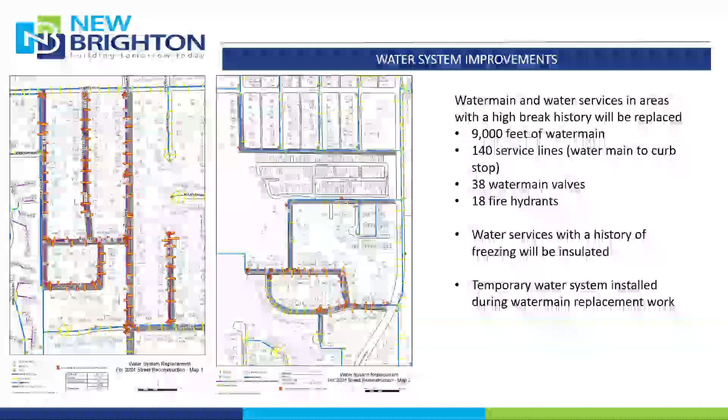And I do see Heather has a question here. Heather, I'll ask you to unmute in just a second. Yeah, can you hear me now? This is Dan, Heather's husband. Hi Dan, how you doing? Pretty good. We're on 19th Avenue. I know that we have a clay tile service line for our sanitary service. And I know that I have some roots in the line, both in our yard, and there's a silver maple in the yard. So there's roots in our service in the right of way. Would there be an opportunity for us to hire our own contractor and have that taken care of, and maybe have PVC put in? And I'm wondering what the coordination would be on that.

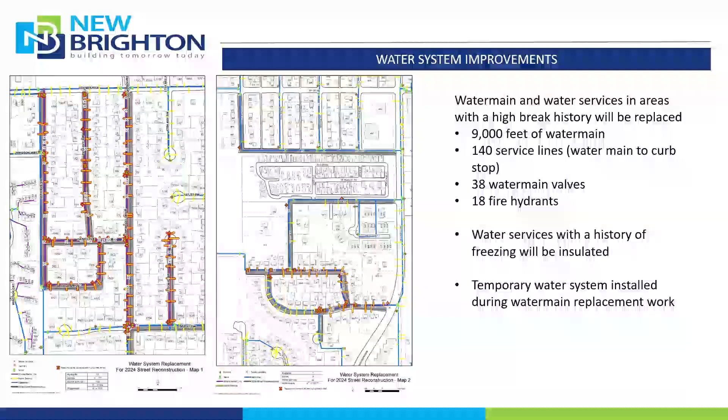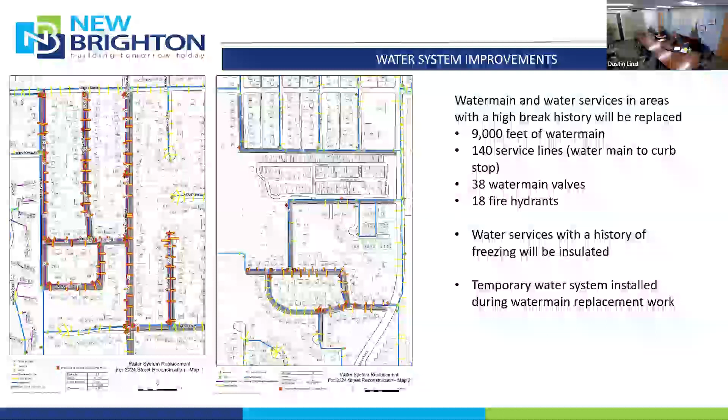Yeah, I think that's a good question. Now would probably be actually the ideal time if you're looking at doing something like that. If you got roots in the right of way, maybe they extend out into the street, noting that we're gonna be tearing up the street, the curbs, portions of the boulevard. And the city's gonna be restoring it. You won't have to worry about those additional costs. So now would be a fantastic time. If you do go through with something, just let any one of the contacts know, and we'll jot it down, and we'll certainly coordinate our contractor around some of that work.

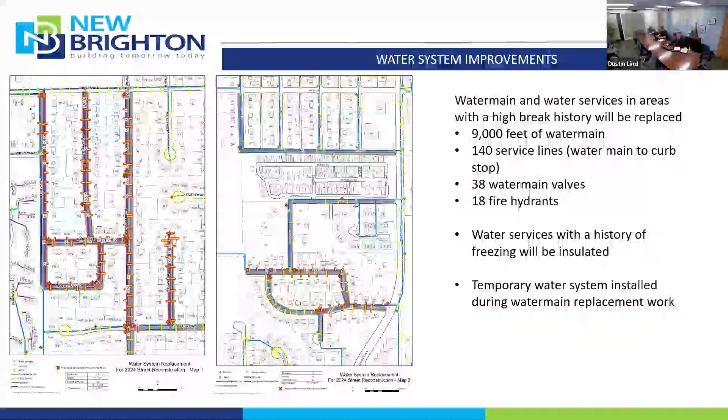Okay, which contact would be best to get in touch with? That would be me, I think. And then I'll pass it along to Steven here. This is Dustin. I'm trying to get back to the last slide here with our contacts. I'm the first one there under these questions. Okay. The other question was, well, I suppose I could ask if there's gonna be grade changes and if that's gonna affect our apron.

Yes. Okay. The short answer is yes. When we look at shrinking the street, obviously now the curbs come in, and with us transitioning to, I think Stephen touched on it a little bit, the barrier style curb, we'll go to a drop down, which is nice at your driveway. You won't have any bump going in there anymore. But that does affect grades a little bit.

So we are planning, and we've been looking. Stephen here has had smoke coming out of his ears looking at driveway grades for the past couple weeks and trying to make things fit. If we need to go up in your driveway 5-10 feet to kind of soften a slope to tie everything back in, we're planning to do so.

Okay, I'll shoot an email to you. Okay, guys, great. I used to be an engineering technician myself, so. Oh, okay. Thank you. Thanks for your time. Thanks for having this meeting. I appreciate it. All right, thank you. Thanks for attending.